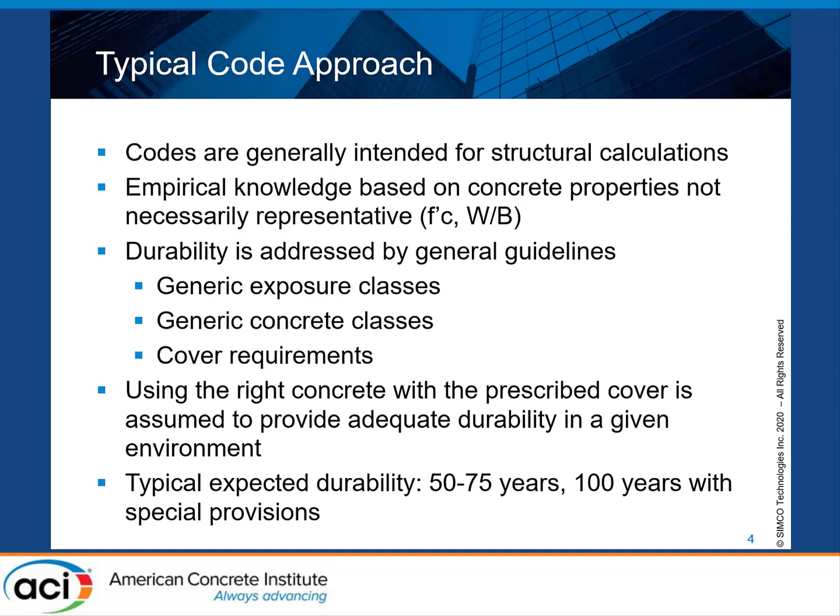And the shortcoming of that is that there's no way of knowing the real effect of the environment with exposure classes. For example, once again with the ACI, you have the C2 class that relates to chlorides. But what does it mean? You may have different types of exposure to chlorides, but there's just one class. So, of course, if you design a concrete to resist chloride exposure, it's better if you know what type of chloride exposure you have, what's the severity, and then you may adapt the concrete mix design to that exposure condition and reach the required durability.

There's no way of knowing the resistance to external solicitation without any durability related requirements. In the codes, sometimes you have an RCPT requirement or a diffusion or a migration coefficient, but in most cases, it's a compressive strength or a water binder ratio, and following that, it's assumed that you will get the required durability, but these properties are not durability related properties. I know there are improvements being made to the different codes. Some are currently ongoing at the ACI, and it will be something that will be greatly improved in the future.

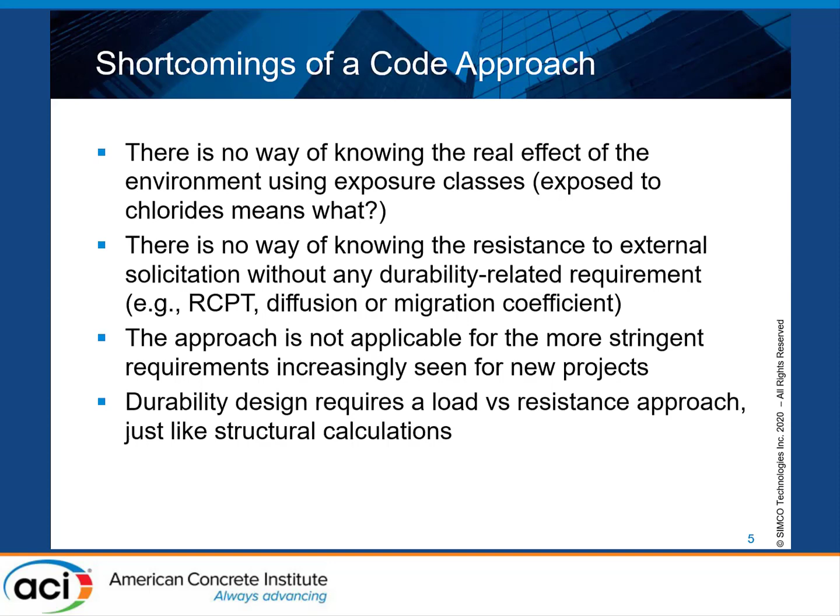And on top of that, just like for structural calculations, you need to know the geometry and the characteristics of the structure. So what type of reinforcement you're using, what's the resistance of this reinforcement to attacks like corrosion, for example, what's the cover. So these are all elements that are important to consider in durability design that are not necessarily all addressed by the codes. And to illustrate what I'm saying, I'm showing you a graph here.

This is taken from a database. At SIMCO, we carry a lot of research projects. So we have a couple of databases with mixes made with different water-binder ratios, different SCMs, different proportions of SCMs, and different ages of testing. So we used a couple of these mixes to build the graph that you're seeing.

So for a mix with 54 MPa, for example, which is the average we get from those results, the diffusion coefficient may range from nearly 0 to, well, don't pay attention to the type of diffusion coefficient here because it's the one we use as an input in our model, but you can see clearly there's a large scatter in the diffusion properties for mixes that have comparable compressive strengths.

And most of these compressive strengths are above 40 MPa, which would be something like 3,500 psi, or, well, sorry, it's higher than that. It's about 5,000, 6,000 psi. So it shows you that just specifying a compressive strength, you don't know what you're going to get in terms of durability.

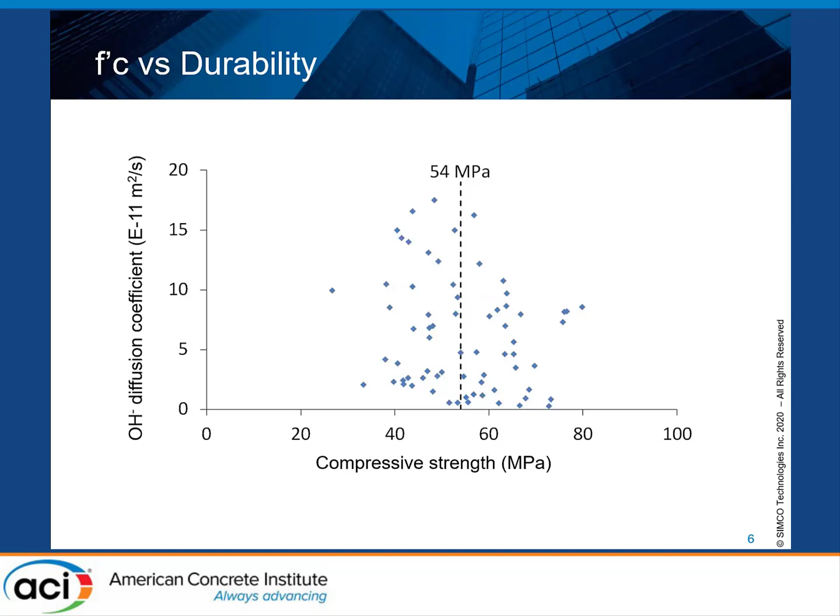You can get anything depending on what's inside the mix and at what age it's tested, because some mixes develop their properties over a longer time than others. So just specifying at 28 days is not necessarily a good thing as well, especially considering the use of SCMs like we do today. Here on that graph, it's a relationship between the RCPT and the diffusion coefficient, I should say.

So it's much better if we have RCPT. It's not perfect, but you see that there's some kind of correlation between the RCPT and the diffusion coefficient. So if codes incorporate an RCPT requirement, it's better than just the compressive strength. But once again, if you look at 1,300 coulombs, which would be considered a good concrete, and you see in codes values of 1,500, 1,000 sometimes, you can still get a large scatter in the results.

In the diffusion properties, as I mentioned, don't pay attention because it's the OH diffusion coefficient here, but it's directly proportional to the chloride diffusion coefficient. So maybe the scale is not something you're familiar with, but the scatter is still there. So the point is that if you're relying on compressive strength, you may get a wide scatter. If you're relying on RCPT, it's smaller, but it's still not a direct indication of the durability you may get.

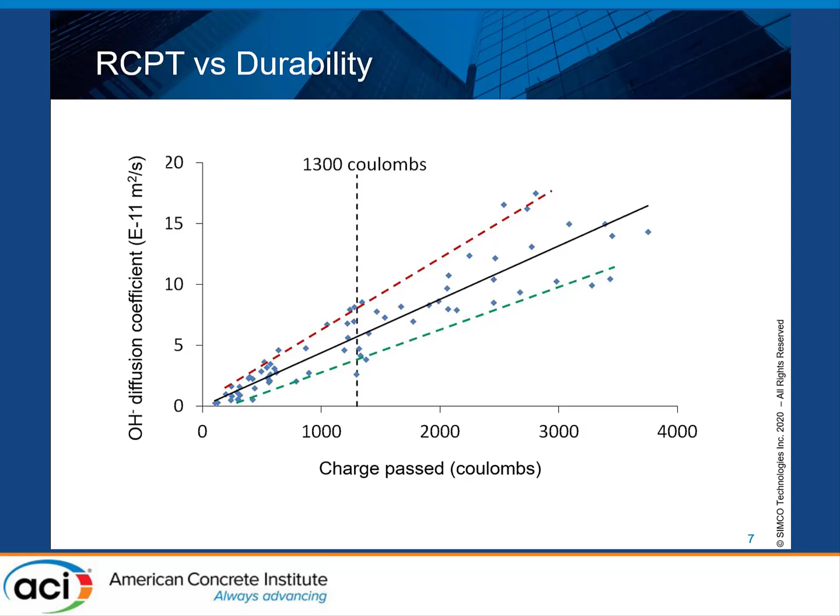I'm going to show you an example here. So I decided to use a marine structure, and following ACI 318, this would be a C2 concrete that is required. It's exposed to moisture and an external source of chlorides. The maximum water-binder ratio is 0.4, minimum strength 35 MPa. I converted in MPa. The cover is 65 millimeters for a corrosive environment. So there's a special provision for a corrosive environment.

And I used also the European code. So based on these requirements, it would be an XS3 for a marine structure. And then I decided to use the tidal zone, because in the European code, the tidal zone is considered as a more severe exposure than the submerged zone. So submerged is XS2 and tidal zone is XS3. So I decided to use the worst.

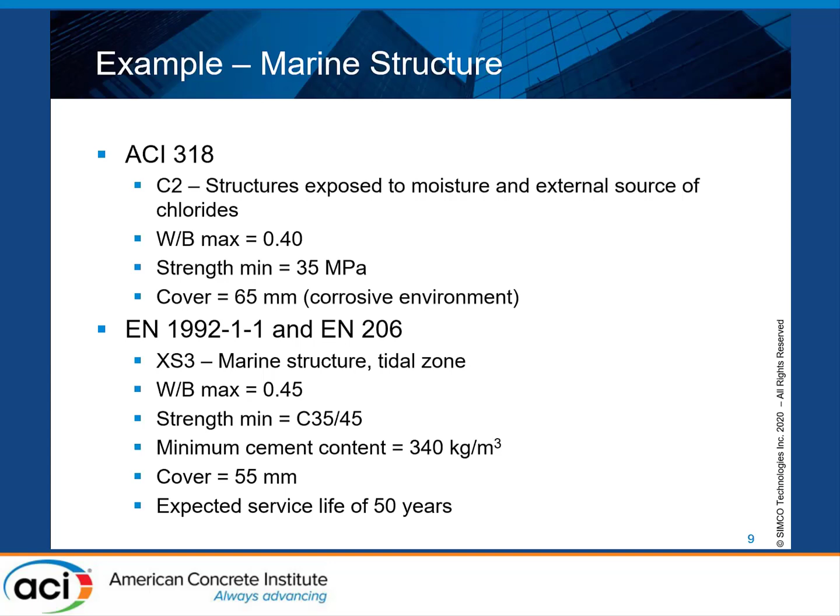The maximum water-binder ratio in that case is 0.45. The minimum strength is 35 MPa, and they have a requirement for minimum cement content, 340 kilograms per cubic meter, minimum cover 55 for that particular case, and this is supposed to give me 50 years of service life. If I want to go to 100 years, then the cover would have to be increased, but I decided to use the basic example.

I picked 5 mixes in our database that would all be compliant with these requirements of these 2 codes. They all have a water binder ratio of 0.4, but different types of SCMs and different replacement levels of those SCMs, and they have all the same binder content.

So I know you may think the binder content is low, but this was for a research project, and the binder content was kept constant for all mixes. So you may see larger binder contents in mixes with SCMs and mixes designed to get a good durability. In that case, the purpose was not to design, but to compare different mixes. So that's why they have all that binder content.

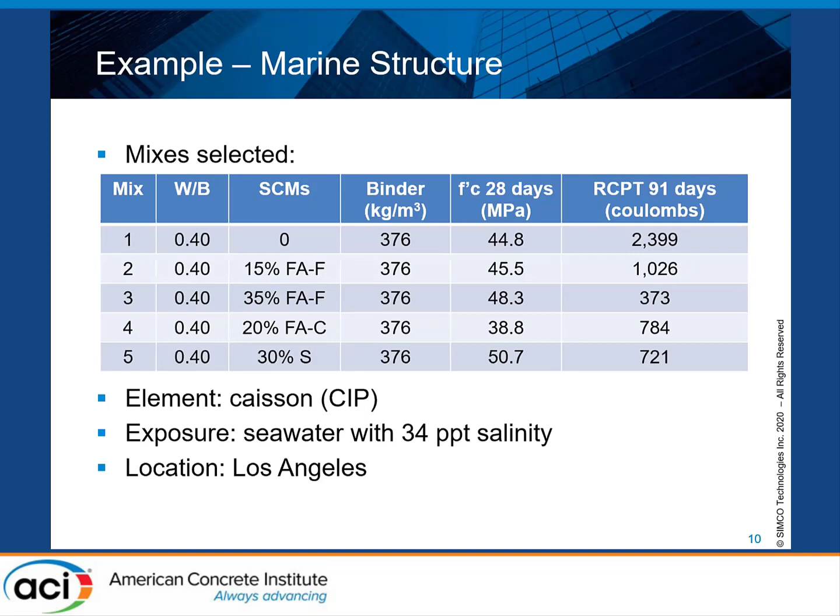And you can see that based on the modeling that we did, none of these mixes get us to a corrosion initiation time of 50 years, and even less, 75 years. So the most that we can get is 30 years. And I decided the threshold would be at 500 ppm. It's not a strict calculation based on the cement content, but it's in the range of values that we get usually. And you can see that even if the threshold varies, it doesn't get us to 50 years.

And that brings us to the definition of service life. On this graph, it shows time to corrosion initiation. If you need a service life that includes a time to damage and a propagation phase, then you may add a few years, but I mean, you may get to 50 years, but it's a long shot to pretend that we can get 20 additional years after corrosion initiation.

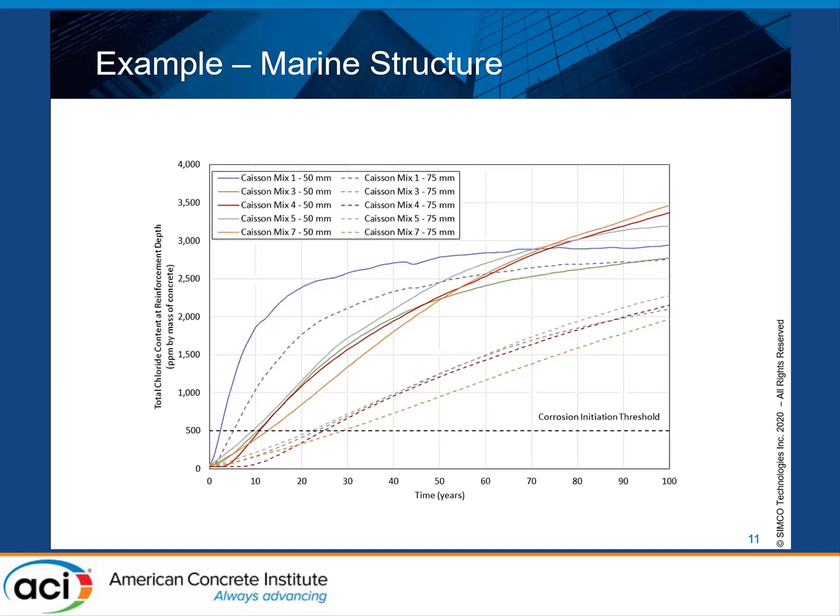So this shows that by complying with that type of model, and the assumptions may be disputed, I know that that's one model among others, but I don't necessarily get to 50 years just by following the code approach. So we need to do something else. And that's why I was saying that we need to consider the site exposure conditions and the local properties, and design concrete mixes based on that to ensure that we reach the desired service life objective.

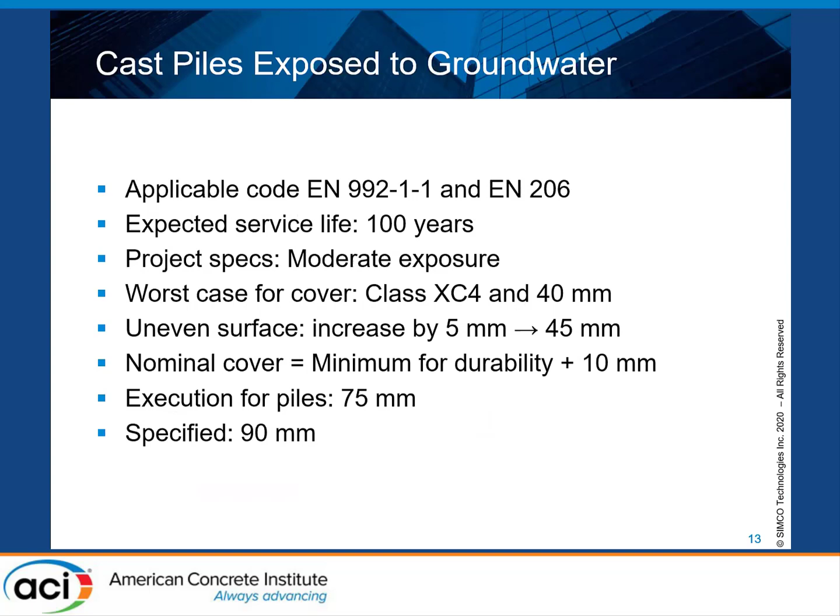Well, okay, I'm gonna jump just to show you that in that case, modeling after 100 years of real conditions, the cover requirement was 75 millimeters. What was specified was 90 millimeters, but I only needed 23 millimeters because the concrete was so good. It has a diffusion coefficient less than 1 × 10^-11 square meters per second, and a high binder content, so a high threshold. So the real cover was much less than required. So we got a much better performance than if we were just following the code.

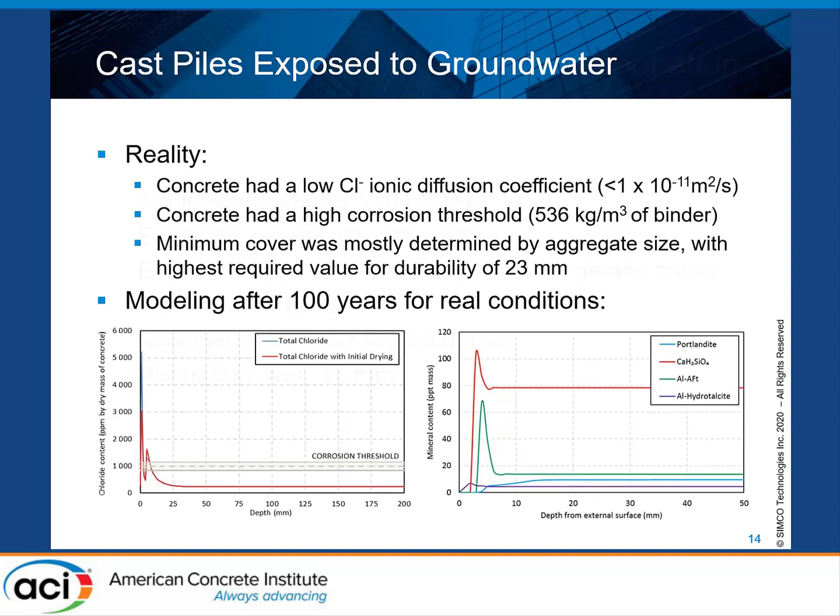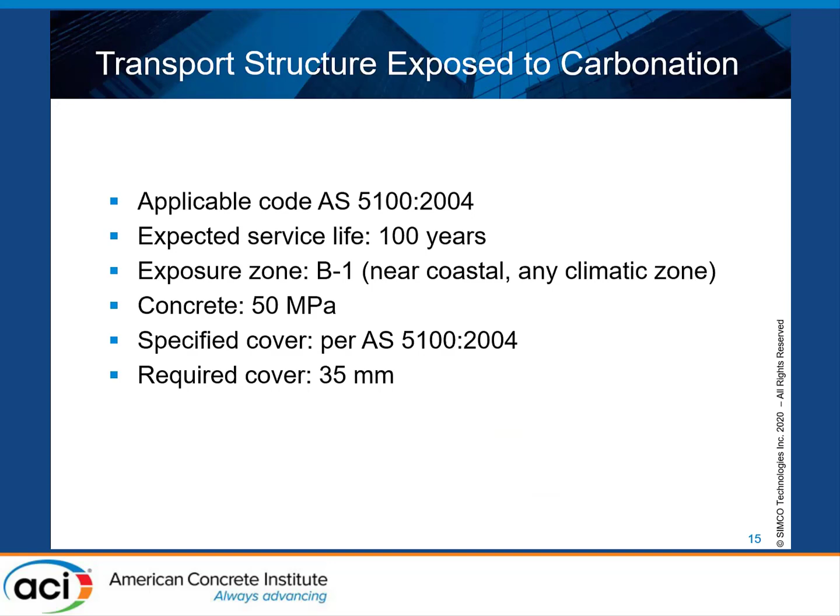The other example here is in Australia. I'm going to go fast. It was for carbonation. The required cover was 35 millimeters. I'm going to skip through that, but in reality, based on the concrete properties we were measuring that were much better than expected, we needed only 16 millimeters determined by modeling. And if we were using the conventional approach based on the measured carbonation at a given age, we were getting on average 19 millimeters. So modeling and the traditional approach gave much lower covers than what the code was requiring.

So this is an important difference, because you may end up with litigations if the bars are not placed properly. So it's better to check with the real properties and real exposure to determine what is really needed than just following the codes.